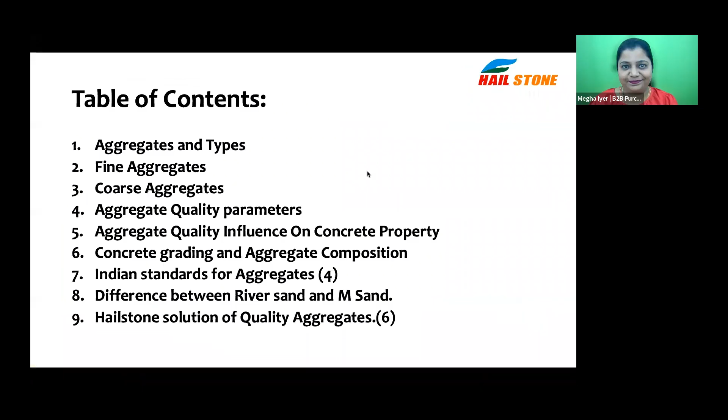So basically, the point of discussion will be quality of fine and coarse aggregates. We'll be going through aggregates, the different types, what are fine aggregates, coarse aggregates, what will be the quality parameters for the aggregates, then what the quality of aggregates influences on the concrete property, then the grading of the concretes and the composition of the aggregates, and a few standards. So that is what we will be focusing on.

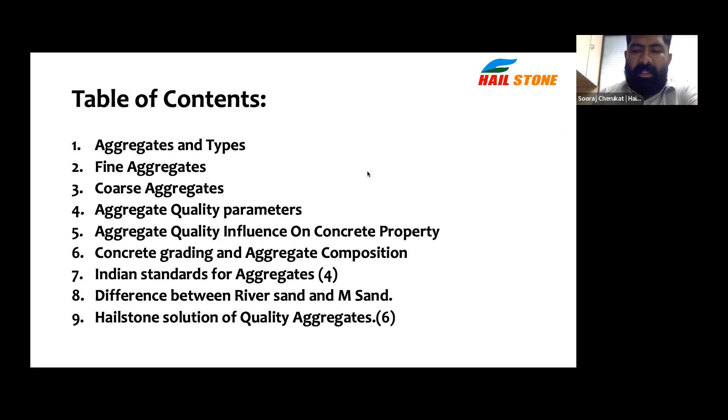So now when we come to aggregates and the types, aggregates are basically divided into fine and coarse. Anything below 4.75 mm is called fine aggregates, which are basically like sand, dust. This is aggressively used for plastering purposes as well as for concreting purposes. Coarse aggregates are those which are above 4.75 mm, basically the bigger aggregates. It can be 6 mm, 10 mm, 12 mm, 20 mm, 40 mm and all, which are basically used in the process of construction activities.

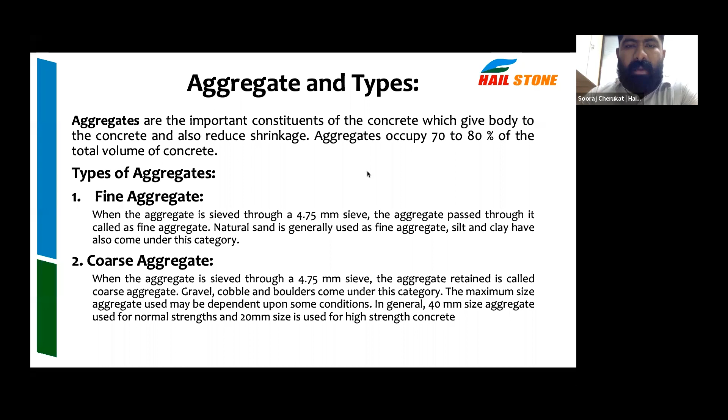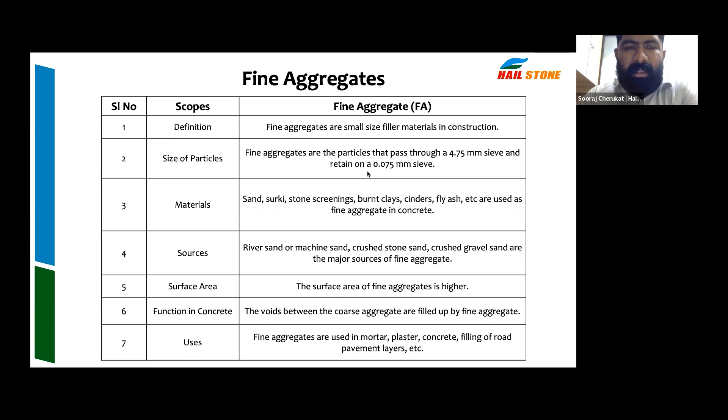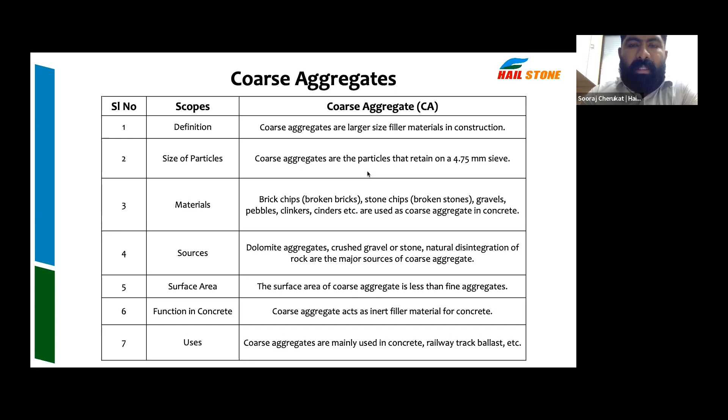Details on the fine aggregates: the particles will be less than 4.75 mm and the smallest particle will be 75 micron as per the different standards. These are used for various applications, mainly in construction of roads as well as in concrete. Coarse aggregates, as already mentioned, will be above 4.75 mm, to 6, 10, 12 and so on. These are also primarily used in concrete as well as for road construction.

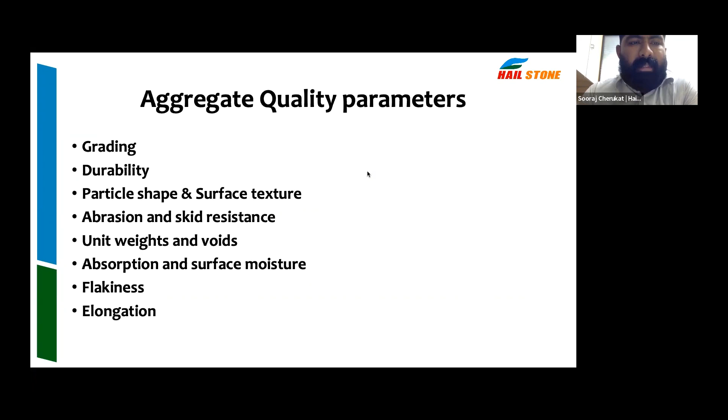When we look into the quality parameters of different materials, the major ones are: first, grading; second, durability; third, particle shape and surface texture; fourth, abrasion and skid resistance; fifth, unit weight and the voids; sixth, absorption and surface moisture; lastly, flakiness and elongation. So how the quality of the aggregates being used affects the quality of the concrete is of big concern. The more the quality is ensured for the components used, the longer the life of the concrete.

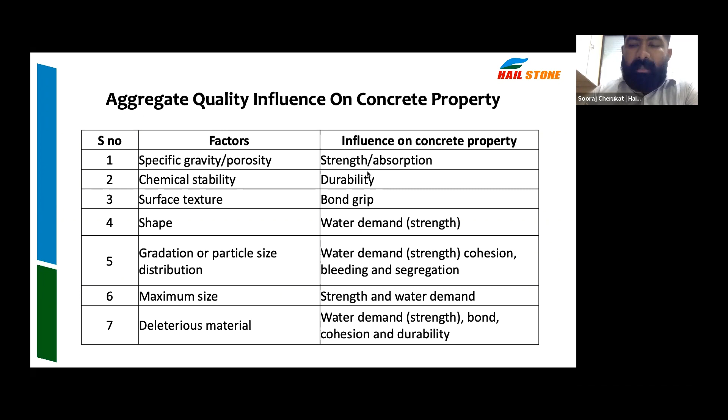Gradation. Gradation is basically, when we do a sieve analysis, how well the particles are equally separated. That is of good concern. And the maximum sizes. And lastly, the deleterious materials, if there are some impurities. When we look into different grades of concrete and the aggregate compositions, starting from M10 up to M45 being used in the market, predominantly the most common are M25, M30, and M35. In these situations, the durability of the concrete is of high concern.

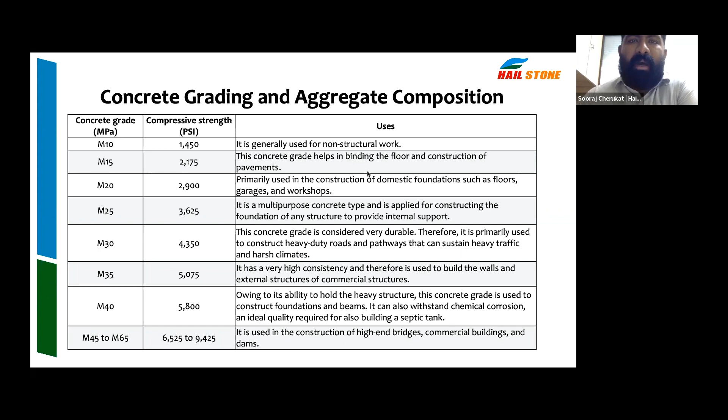The various standards in India which very much determine the quality are IS 2386 primarily. It has 8 parts. The 8 parts are not all relevant because it very much depends on what particular concrete you are going to test. Otherwise, it's IS 2386 as well as IS 383.

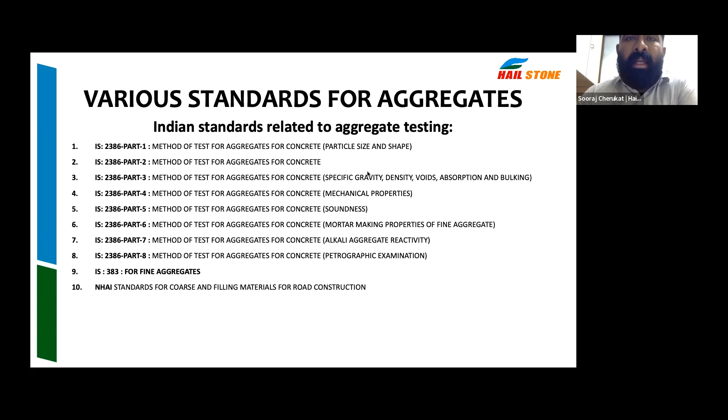IS 383, whose latest version is 2016, clearly defines the different quality aspects for fine aggregates used for road construction, building construction and all other infrastructural developments. The previous version was 1970, which was revised in 2016. Currently, all the materials produced in various crushers and used for construction activities are tested using IS 383. Now, for the coarse aggregates, IS 2386. This is the standard which defines the usage for all construction materials on the coarse side.

As per IS 383, for a sand or fine sand, or we call it plastering sand or concrete sand, this sand to be perfect, it is further divided into 4 zones: zone 1, zone 2, zone 3, and zone 4. And the size starts from 75 micron. The very lesser is the 75 micron to 4.75.

And always what is being done is the sieve analysis. Whenever any crusher manufactures a sand, the quality of the sand is ensured by doing a sieve analysis. And doing this sieve analysis, it has to be ensured that the distribution of different sizes, for example, as shown, 4.75, 2.36, 1.18, 600, 300, and 150 microns. This micron specification and the gap should be ensured exactly between these areas.

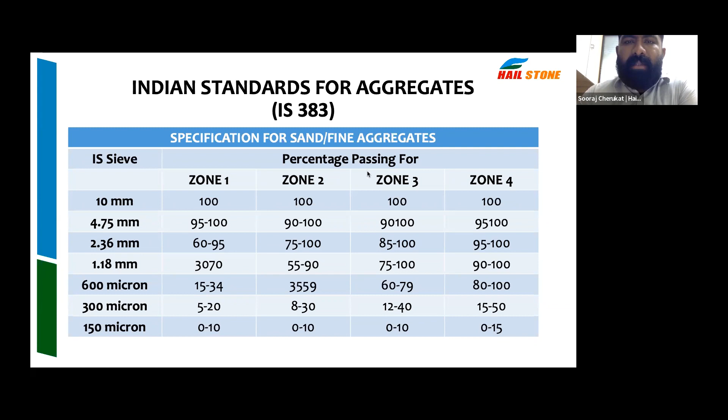And predominantly in the Indian market, zone 2 is the demanded zone for construction activities. Everybody wishes to ensure that the sand which is being used, which is equal to or better than river sand, has to pass the zone 2 certification or zone 2 classification from a proven lab. Now it is again the same IS for the 10 mm, 6 mm and all these things. Again IS 383. So IS 383 again is used for 20 mm aggregates.

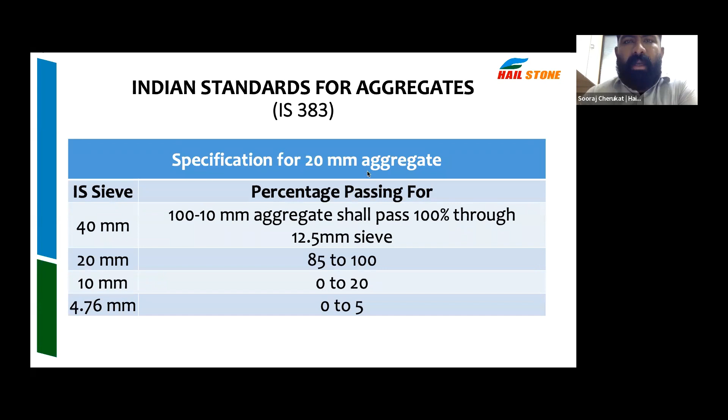Now I wish to just bring a very small comparison. Nowadays people are predominantly depending on M sand when compared to river sand on the quality perspective, as well in few areas river sand is coming back. For example, Tamil Nadu and those areas, now river sand is again coming back. Few other states river sand is banned. So what is an exact apple to apple comparison between M sand and river sand? M sand, as everybody knows, is a manufactured one.

It is basically the dust which is being manufactured using two or three options. It can be from a cone crusher, a VSI, an HSI, or it can be produced from a roller crusher. This dust is properly classified and made into usable sand by the process of wet classification or dry classification, where the microfine elements are removed using different equipments and brought into the particular segment as per the IS standard.

Specifically, 75 microns below is normally removed from M sand, but it is permitted up to almost 15% as per the standard. But in river sand, it is only up to 3%. So that is one of the biggest advantages of river sand. But on the other things, it is almost matching.

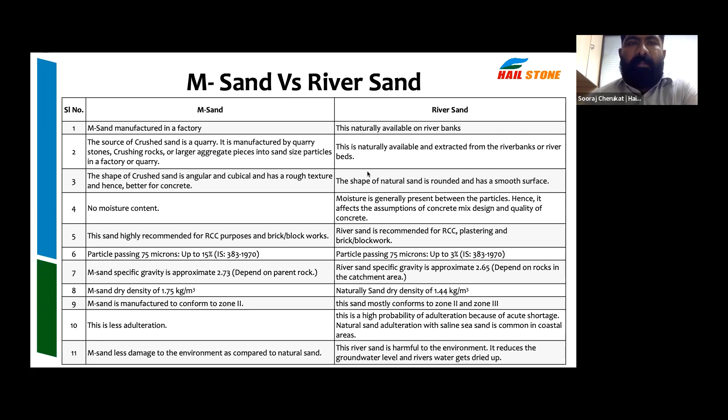Only thing is you can have various vegetation materials, biodebris, and other things in the river sand, which can reduce the quality when compared to M sand. But as everyone knows, the impact on the environment is lesser with M sand over river sand.